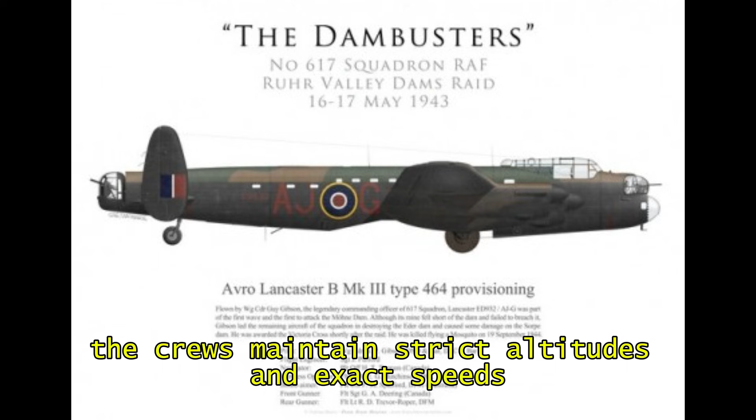Below them lie the reservoirs that power the Ruhr's industrial network. Above them, the crews maintain strict altitudes and exact speeds, trusting machines refined to hold stability at moments when even minor structural weakness could alter the entire outcome.

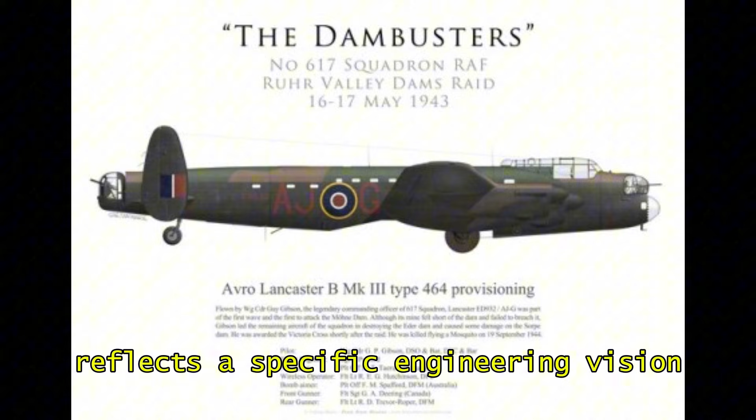Every decision embedded in these aircraft reflects a specific engineering vision shaped years earlier, inside workshops far from the battlefield. As these bombers approach their targets, the success of the operation rests on whether those engineering choices can withstand an

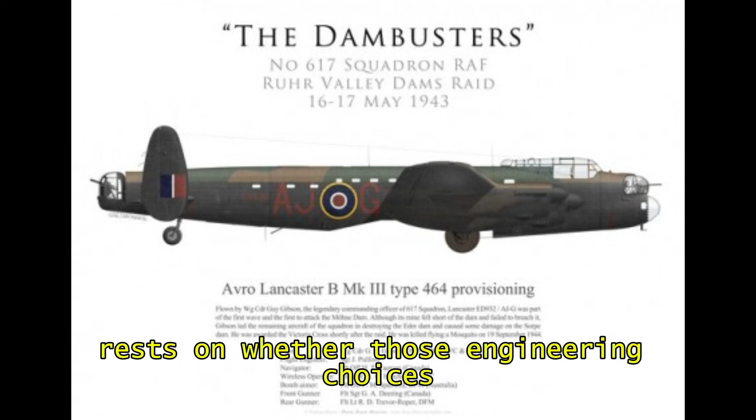environment defined by turbulence, load variation, and the inherent unpredictability of night flying. For viewers following this journey, understanding how such precision became possible adds depth to the entire story that unfolds.

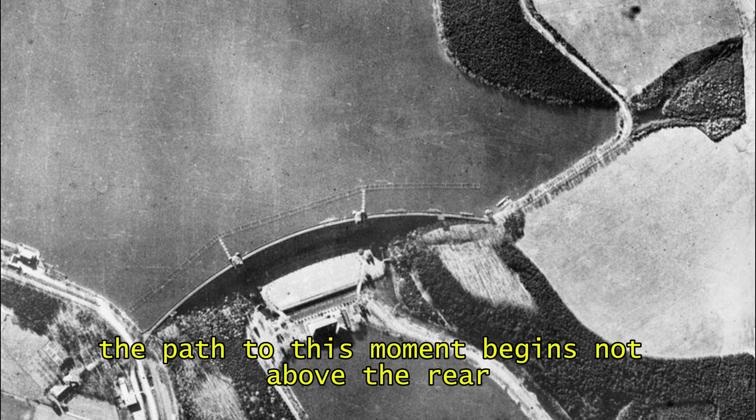The path to this moment begins not above the Ruhr, but inside the British aircraft industry, where a shift in strategic thinking forces designers to rethink how long-range aviation should function.

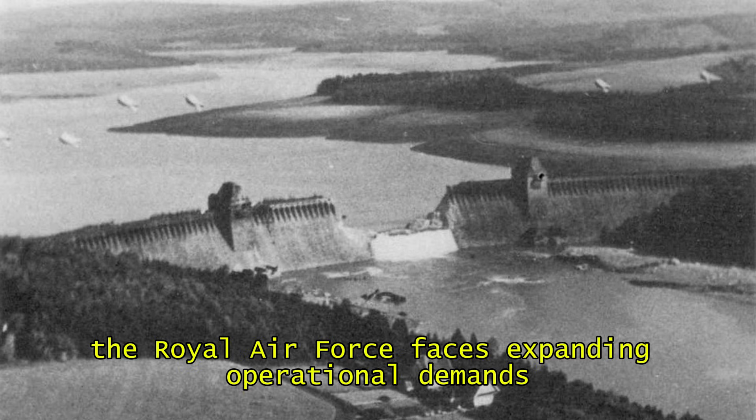By the mid-1930s, the Royal Air Force faces expanding operational demands. Aircraft conceived for limited payloads and moderate range can no longer support a doctrine increasingly shaped by industrial targets located far beyond Britain's borders.

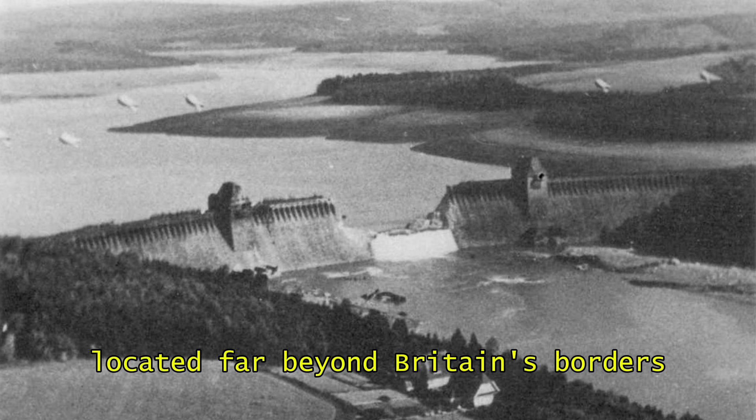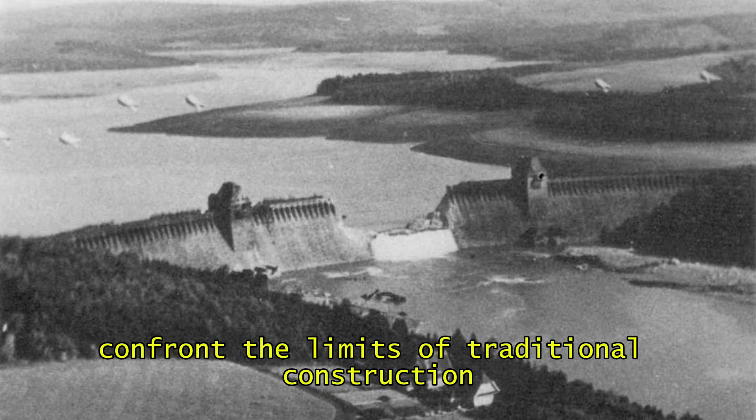Factories study airflow with greater scientific rigour, wind tunnel research grows more influential, and structural engineers confront the limits of traditional construction.

Riveted frameworks that once defined British aircraft design now reveal weaknesses under heavier loads, while aerodynamic efficiency becomes central to every discussion about future bombers.

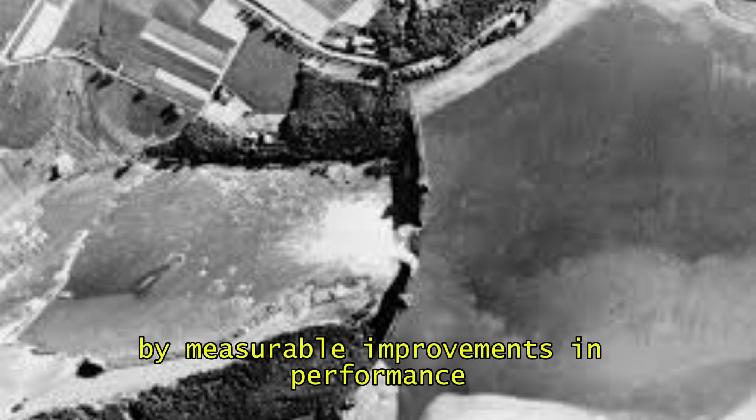The evolution of air power transforms design offices into laboratories where every modification must be justified by measurable improvements in performance, reliability, and mission endurance.

It is within this climate that Roy Chadwick develops a methodology distinguished by its discipline and clarity. Working inside the expanding facilities of Avro, he focuses on the relationship between structural strength, aerodynamic behaviour, and long-term operational demands.

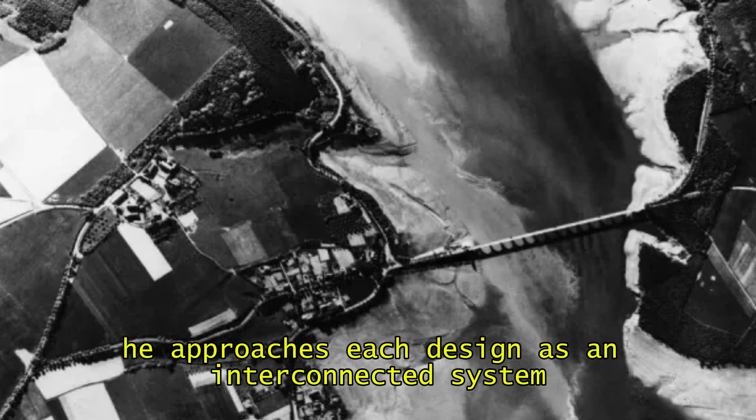Instead of prioritizing isolated performance gains, he approaches each design as an interconnected system shaped by load paths, vibration tolerance, fuel distribution, and manufacturing efficiency.

His early work demonstrates a consistent effort to identify failure points before they appear in flight. This mindset leads him to refine fuselage geometry, reinforce key structural nodes, and optimize internal layouts to support larger payloads

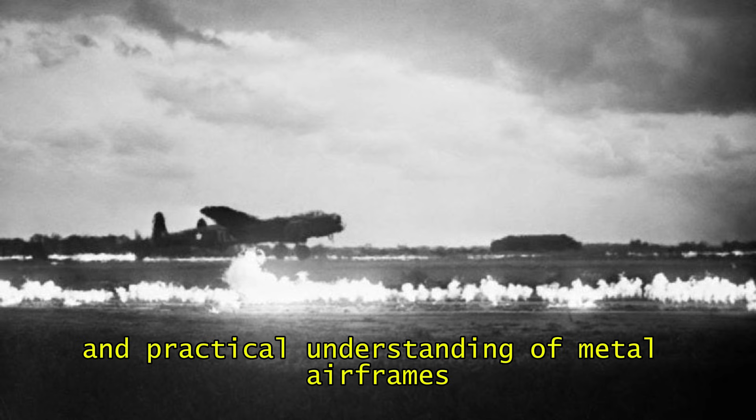without compromising stability. The combination of analytical thinking and practical understanding of metal airframes allows him to interpret Air Ministry requirements with uncommon precision, providing solutions that balance innovation with the realities of large-scale production.

These principles become crucial as the RAF pushes for aircraft capable of carrying more equipment across longer distances. Chadwick confronts challenges that require an exact understanding of aerodynamics, materials science, and structural mechanics.

Increasing wingspan demands improved torsional rigidity. Higher payloads require rethinking weight distribution across the fuselage.

Greater fuel capacity imposes additional stresses on internal members already operating near their limits. Integrating more powerful engines creates new vibration patterns that must be managed through careful alignment and reinforced mountings.

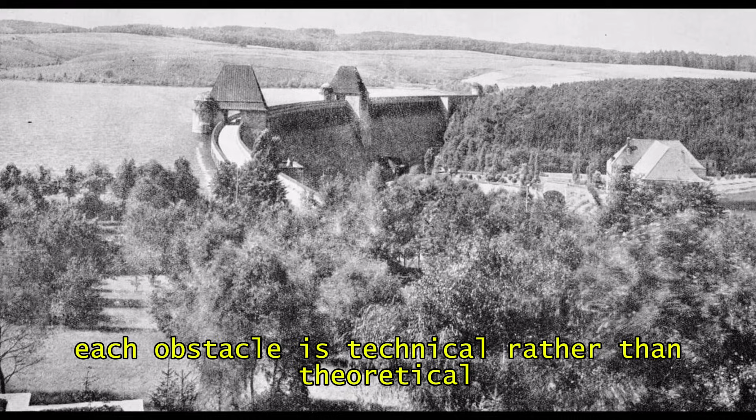Each obstacle is technical rather than theoretical, and solving it requires evaluating how small adjustments influence the overall system. Chadwick's method avoids dramatic leaps and instead builds performance through incremental refinement, ensuring that every modification contributes to an aircraft

that behaves predictably in the demanding environment of long-range missions. By the late 1930s, these insights converge into a design philosophy that will soon shape one of the most influential aircraft of the war. Without yet naming the project, the foundations are clear: a strong but lightweight airframe, a spacious

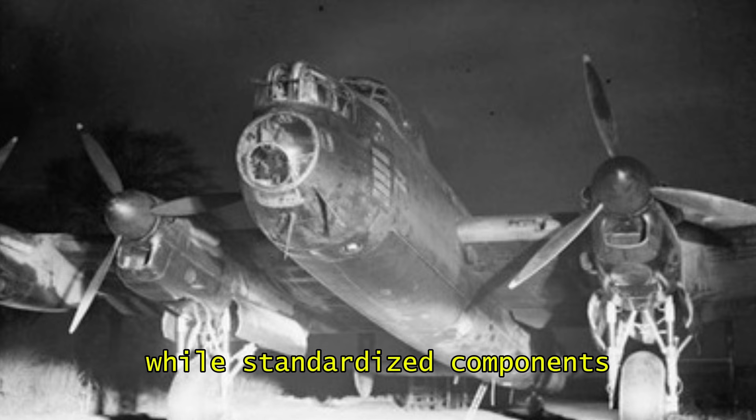internal structure capable of accepting varied payloads, an aerodynamic profile tuned for efficiency at operational altitudes, and a layout optimized for production scale. The emphasis on modularity simplifies repairs in the field, while standardized components reduce manufacturing delays.

This approach produces machines that combine endurance, stability, and adaptability in ways few British aircraft had previously achieved.

The engineering discipline developed during this period becomes one of Britain's most valuable assets once the conflict intensifies, and it directly influences the aircraft that will later perform missions demanding extraordinary precision, including the operation that opened this chapter.

How did Chadwick transform these early engineering principles into the foundation for a bomber that would reshape Britain's aerial capabilities during the war?

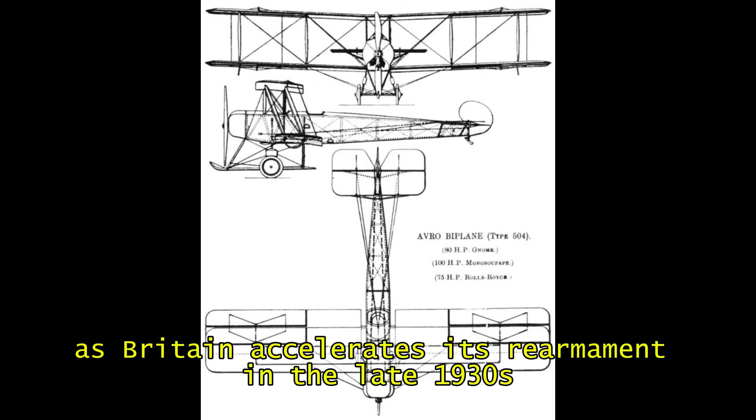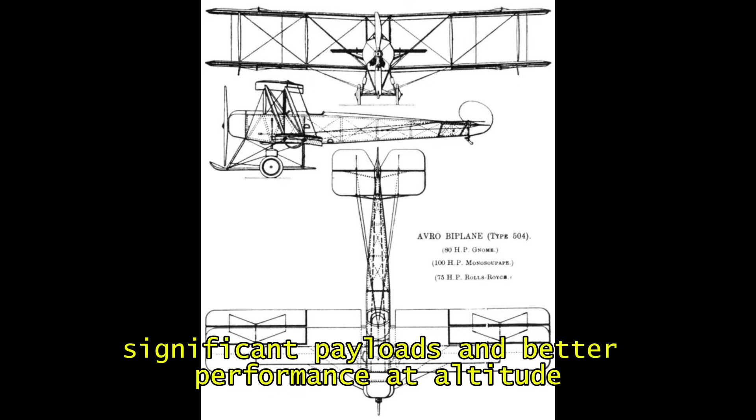As Britain accelerates its rearmament in the late 1930s, the pressure on aircraft designers intensifies. Requirements for long-range bombers grow more complex as the strategic landscape expands beyond local defence. The Air Ministry demands machines capable of sustained operations, significant payloads, and better performance at altitude. Meeting these expectations requires more than incremental improvements.

It requires engineers who can reshape structural logic, revise aerodynamic assumptions, and integrate mechanical systems into a coherent whole. Roy Chadwick steps into this environment with a method grounded in analytical discipline and a willingness to challenge familiar design sequences when evidence supports a better alternative. His early studies of load distribution become central to the evolution of Britain's bomber programme.

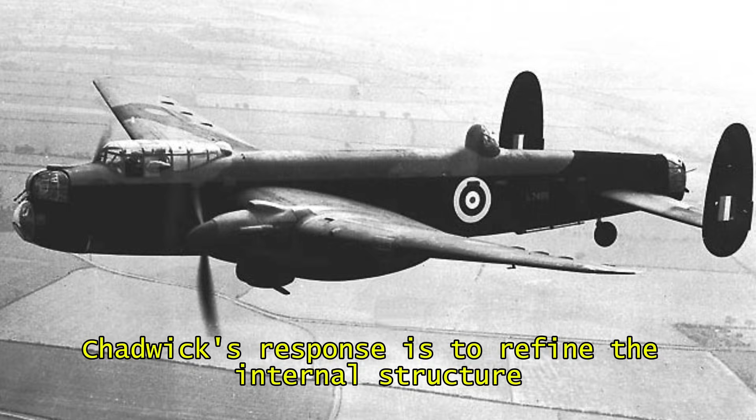Traditional airframes transfer stress unevenly across spars, ribs, and fuselage members, creating points of failure when weight increases or when turbulence imposes dynamic forces. Chadwick's response is to refine the internal structure so that loads flow more efficiently through the airframe. This approach reduces localized stress, increases durability, and allows the aircraft to support heavier equipment without compromising rigidity.

The shift toward more symmetrical load paths also improves stability, particularly during long climbs and sustained turns, where older designs often struggled to maintain consistent behavior.

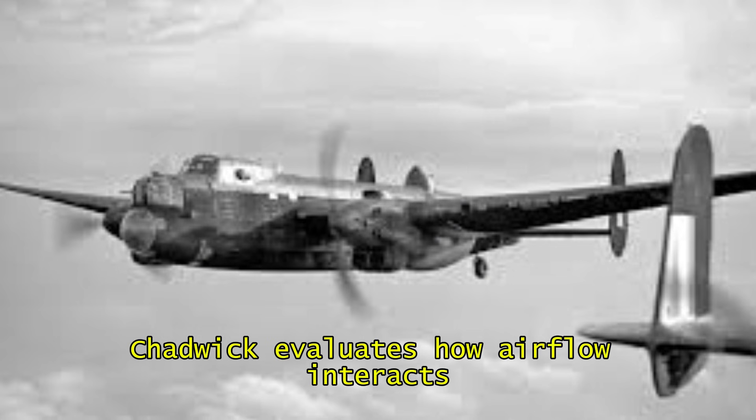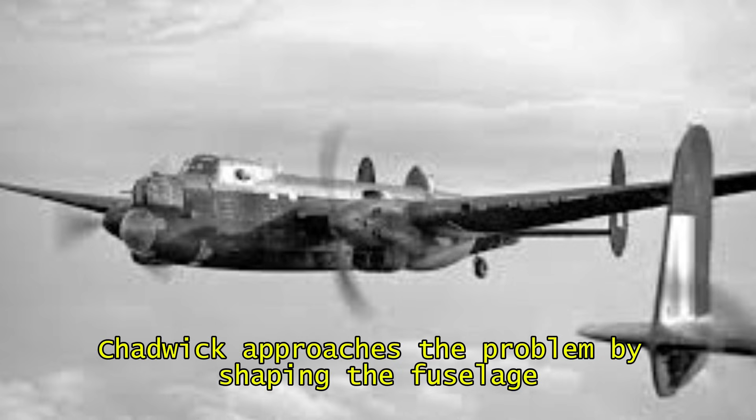Aerodynamic refinement follows closely behind structural improvements. Chadwick evaluates how airflow interacts with expanding fuselage volumes and larger wingspans. Traditional bombers often face drag penalties when designers enlarge the internal space needed for greater range or payload. Chadwick approaches the problem by shaping the fuselage to guide airflow with minimal disruption, reducing drag while maintaining interior capacity.

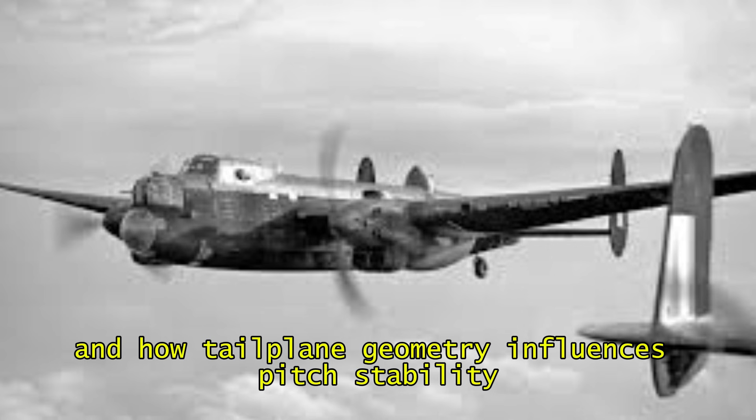He studies how the wing root meets the body, how leading edges affect lift generation at different speeds, and how tailplane geometry influences pitch stability during long missions. These adjustments are grounded in practical testing and analytical review, rather than stylistic choices, reflecting a design philosophy driven by measurable results. One of the most demanding challenges involves engine integration.

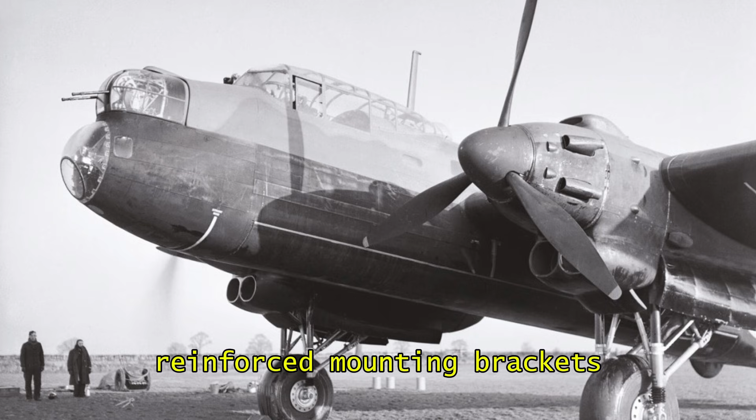As more powerful power plants emerge, vibration patterns increase in magnitude and complexity. Poorly managed, these vibrations can fatigue structural members, affect control responsiveness, and shorten the operational life of critical components. Chadwick focuses on alignment accuracy, reinforced mounting brackets, and airflow improvements around the engine nacelles. By optimizing cooling and airflow stability, he ensures that engines maintain consistent performance across a wide range of operating conditions.

These refinements contribute to more reliable high-altitude flight and improved endurance, both essential to the emerging doctrine of long-distance strategic missions. Chadwick's attention to modular design proves equally important.

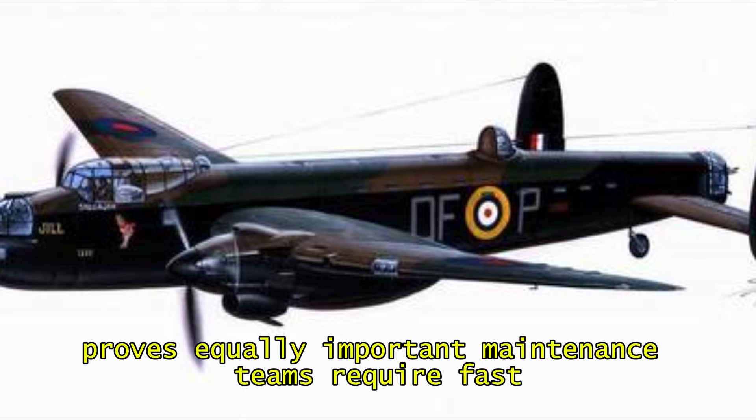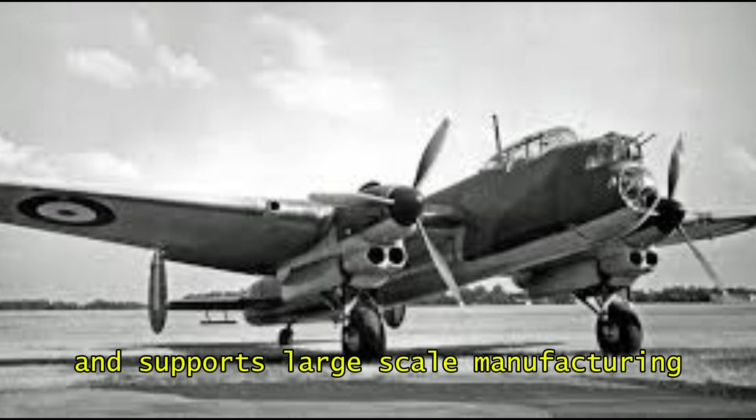Maintenance teams require fast, standardized procedures to keep aircraft operational under wartime conditions. Chadwick develops internal layouts that simplify inspections and repairs by separating critical systems into accessible sections. Wiring, hydraulics, and mechanical controls follow paths that minimize interference with structural members, making it easier to trace, repair, or replace components. This modular approach reduces downtime, increases survivability, and supports large-scale manufacturing by enabling assembly lines to operate with fewer bottlenecks.

By the time Britain enters the conflict, Chadwick's design principles align with the operational needs of the Royal Air Force, which now requires long-range capability on an unprecedented scale. Missions involving industrial targets deep inside occupied territory demand aircraft capable of flying greater distances with heavier payloads while maintaining structural coherence.

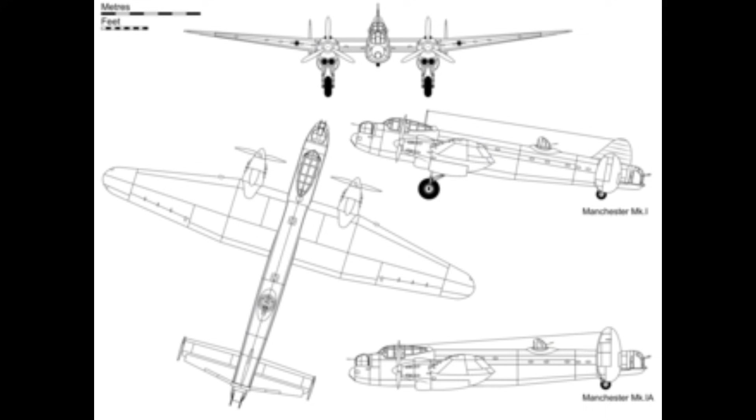Conventional designs face limitations that cannot be resolved through minor adjustments. Chadwick's integrated methodology, built over years of refining structural logic, aerodynamic balance, and mechanical reliability, positions him at the centre of Britain's effort to produce a next-generation bomber that can meet these requirements.

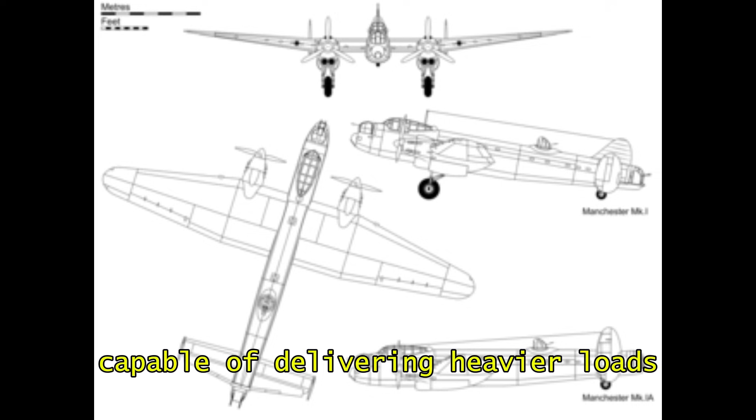As Chadwick consolidates his work, he begins conceptual development on a platform capable of delivering heavier loads across broader ranges than any aircraft Britain has previously fielded.

The emerging design incorporates his core principles: a strong internal framework distributing stress predictably, a fuselage shaped for aerodynamic efficiency, a wing structure capable of supporting large spans without inducing excessive torsion, and internal space optimized for both fuel and payload flexibility. The design avoids excess complexity, relying instead on coherence, strength, and adaptability.

It is not yet the aircraft that will later mark a turning point in the conflict, but the framework is in place and the technical direction is set.

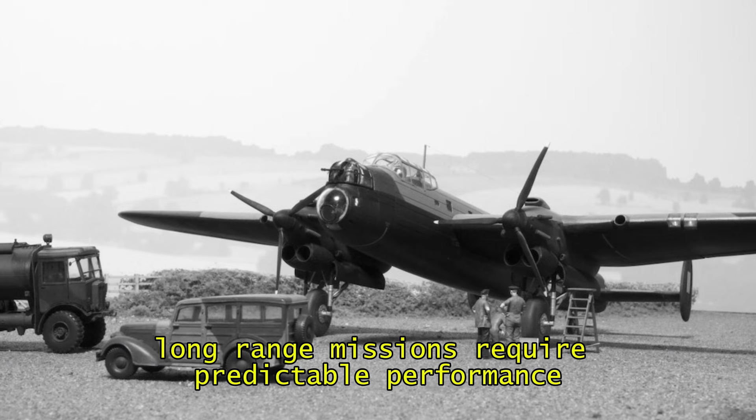These design choices reflect more than ambition. They represent a response to quantifiable needs. Long-range missions require predictable performance under heavy load. High-altitude operations demand aerodynamic stability and consistent engine behavior. Wartime production requires standardized components and ease of maintenance.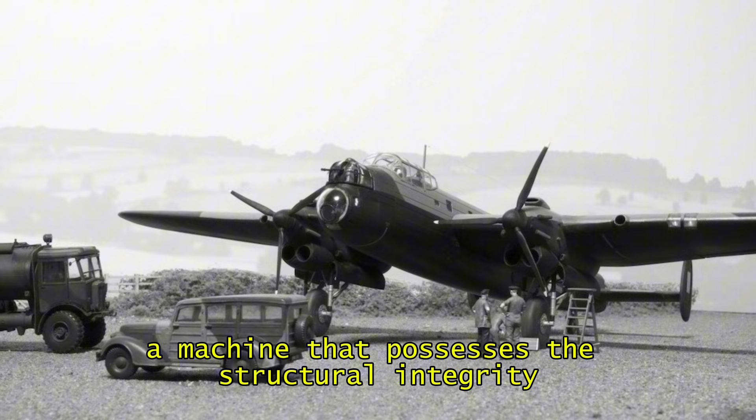Chadwick's design process integrates these demands into an aircraft emerging from disciplined analysis rather than dramatic leaps. The result is a machine that possesses the structural integrity, aerodynamic efficiency, and operational flexibility the RAF requires for missions reaching farther into contested airspace.

As the war accelerates and the demand for advanced bombers intensifies, Chadwick's methodology is positioned to deliver an aircraft capable of supporting the most demanding operations of the conflict, including missions defined by precision, endurance, and extraordinary structural resilience. How would Chadwick refine this emerging design into a bomber that could carry unprecedented loads across long distances while maintaining stability under combat conditions?

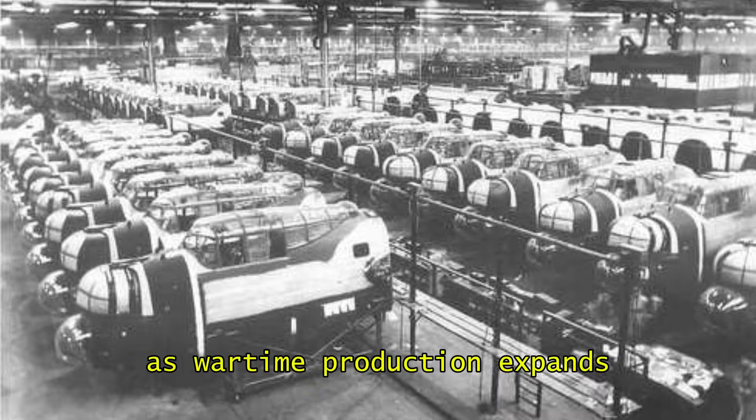As wartime production expands, Britain faces a challenge that reaches beyond individual factories. The nation must create a heavy bomber capable of carrying significantly larger payloads while sustaining reliable performance across long distances. Earlier designs had provided valuable lessons, but none offered the balance of strength, efficiency, and adaptability needed for the operations that now shape strategic planning.

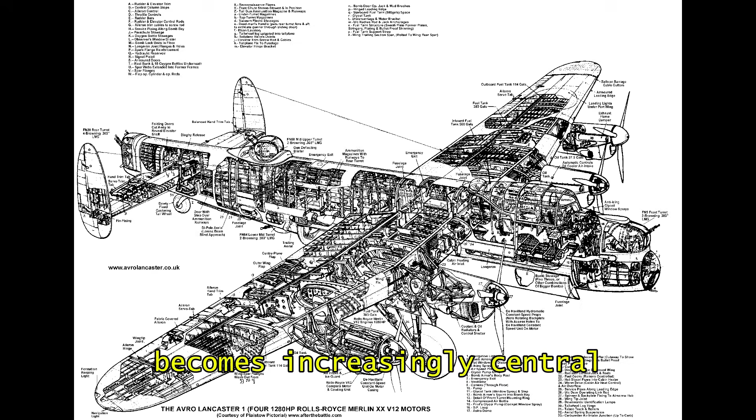In this environment, Roy Chadwick's analytical approach becomes increasingly central. His work is no longer just about improving components. It is about defining a complete architecture able to withstand the structural and aerodynamic demands of deep-range missions. The design program evolves into a comprehensive response to operational needs.

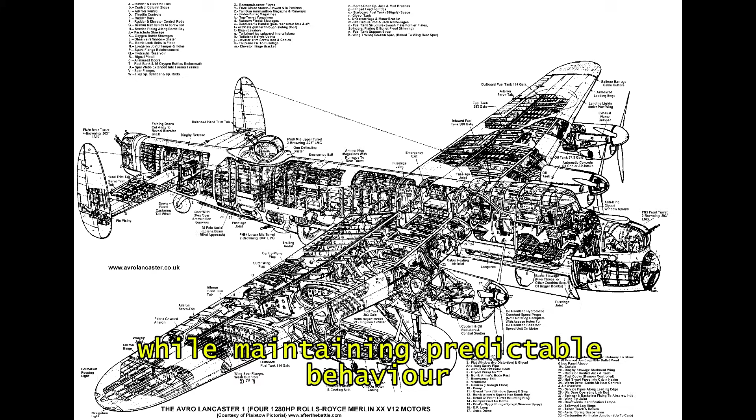Chadwick examines how to distribute weight across a wider wingspan while maintaining predictable behavior at both high and moderate altitudes. He refines the main spars to handle greater bending moments, adjusts the internal bracing to eliminate unnecessary mass, and shapes the fuselage to guide airflow smoothly along its length.

Large bomb bays require a structure that can remain rigid even when empty or partially loaded, and he solves this by reinforcing subtle transition points where the fuselage shifts from curved to flat geometry. These refinements produce an aircraft capable of accepting varied payloads without destabilizing its aerodynamic profile.

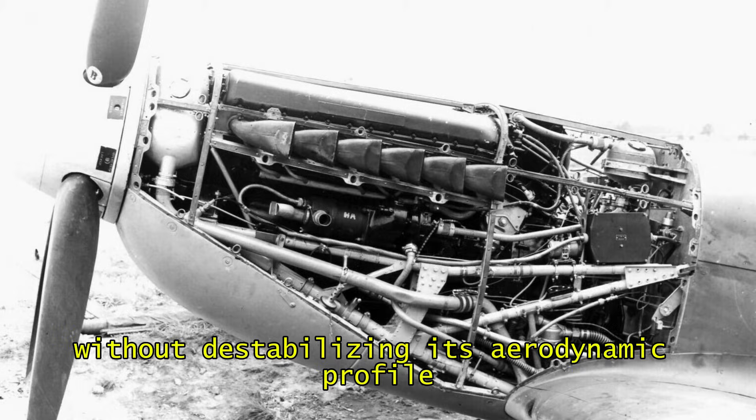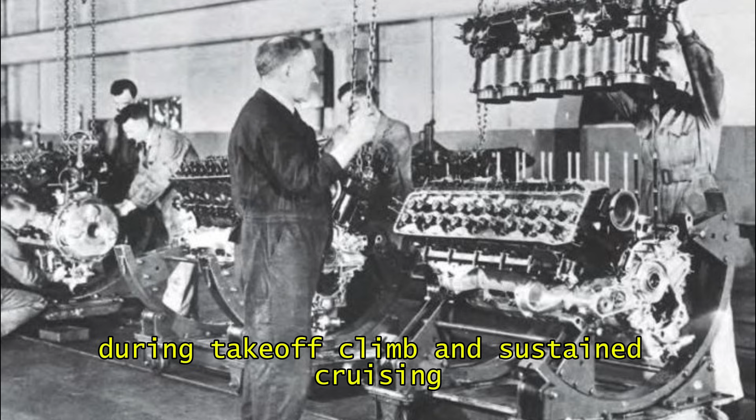Engine selection introduces new technical hurdles. More powerful power plants promise improved performance, but their integration demands careful alignment and vibration control. Chadwick invests significant effort into evaluating how nacelle placement affects airflow along the wing surface and how changes in thrust patterns influence stability during takeoff, climb, and sustained cruising.

Cooling systems must operate efficiently at high altitudes where temperatures drop sharply and airflow becomes thinner. Exhaust arrangements must minimize turbulence that could interfere with flaps or ailerons. Every modification aims to ensure that the aircraft can maintain consistent behavior across long missions, regardless of weather, altitude, or load.

Engine reliability becomes a structural concern as much as a mechanical one, and Chadwick's design decisions reflect this interdependence.

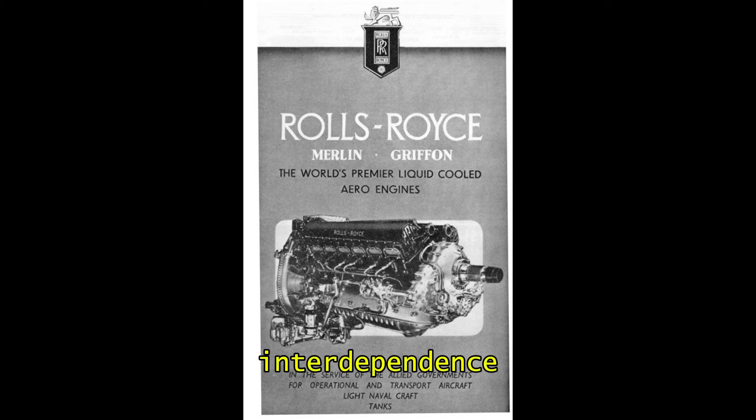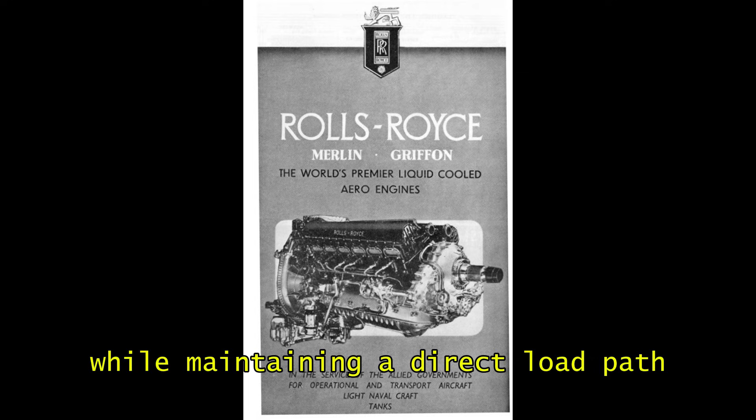Internal layout receives equal attention. A bomber designed for long-range operations requires space for fuel, crew movement, equipment, and defensive positions, while maintaining a direct load path that strengthens the fuselage rather than weakening it.

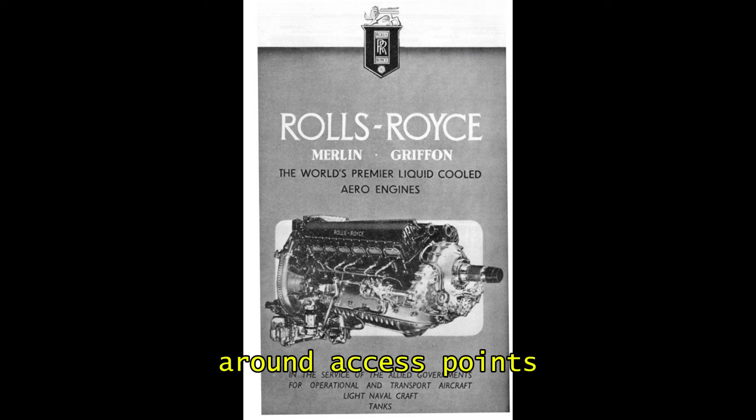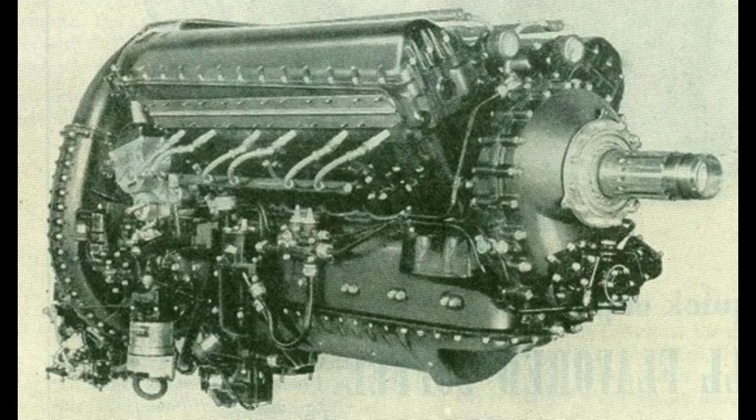Chadwick organizes the internal framework to avoid concentrated stress around access points. He places key systems where maintenance teams can reach them quickly, and ensures that hydraulic and control lines follow clear, protected routes. This thoughtful arrangement reduces downtime, simplifies wartime repairs, and prepares the aircraft for adaptation as operational needs evolve.

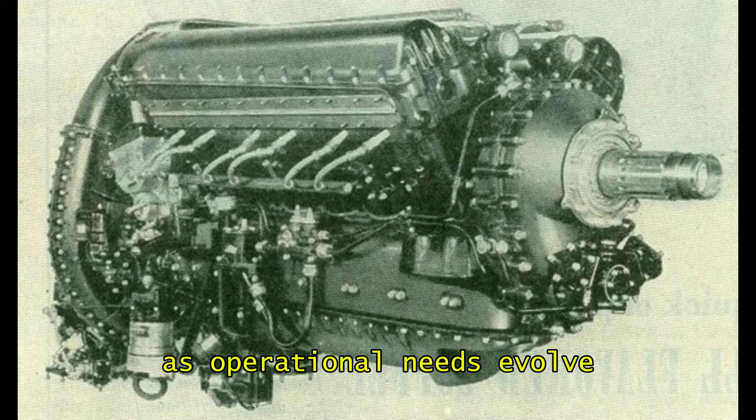The emphasis on accessibility and modularity reflects Chadwick's belief that an aircraft's effectiveness is defined not only by performance in the air, but also by its maintainability on the ground.

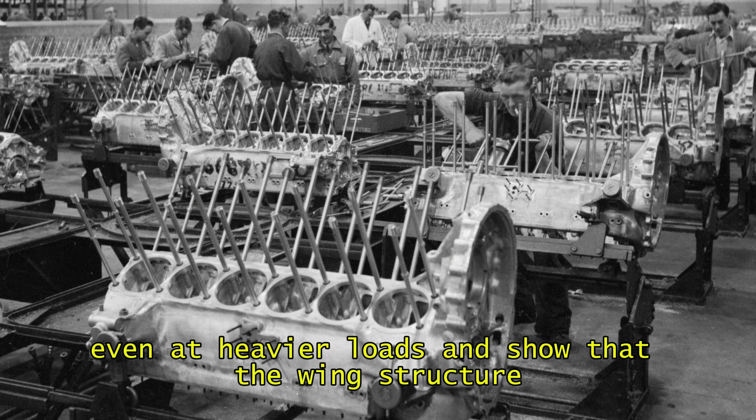As testing progresses, the new design begins to reveal its full potential. Flight trials demonstrate stability even at heavier loads and show that the wing structure sustains aerodynamic forces without producing excessive twist. The fuselage maintains predictable behavior during steep turns, and the internal framework remains solid after repeated stress cycles.

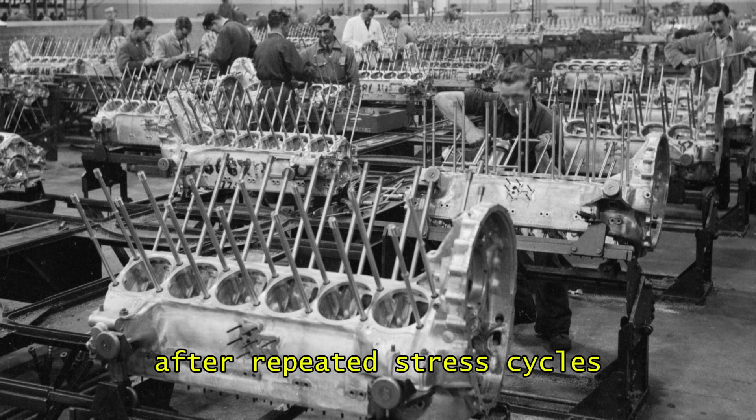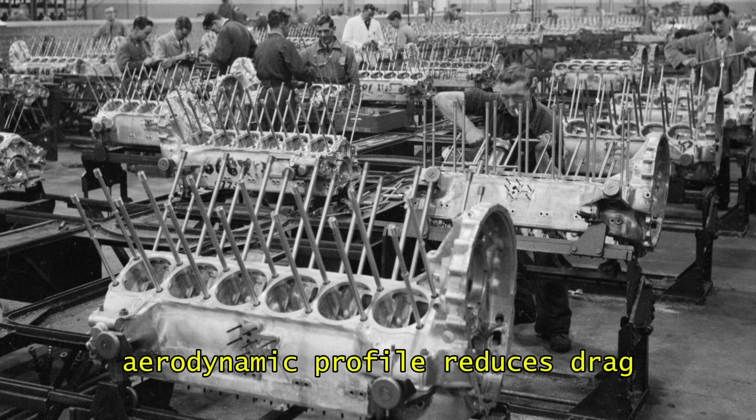The aircraft manages to carry payloads that exceed previous expectations, while still offering range suitable for the emerging demands of strategic missions. Engineers note how its refined aerodynamic profile reduces drag, allowing it to maintain strong performance across long distances.

The design approach becomes a benchmark for heavy bomber development, combining structural intelligence with aerodynamic efficiency. These achievements prepare the aircraft for missions that require endurance, precision, and resilience under conditions that test every part of a machine.

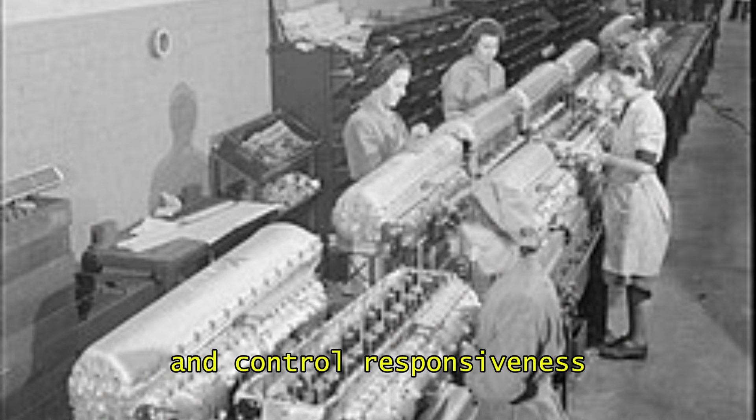Long-range operations impose sustained stress on wings and fuselage. High-altitude flight exposes materials to temperature changes that affect flexibility and strength. Defensive maneuvers test torsional rigidity and control responsiveness. Yet the aircraft's behavior remains consistent, validating Chadwick's insistence on integrating every decision into a coherent structural logic.

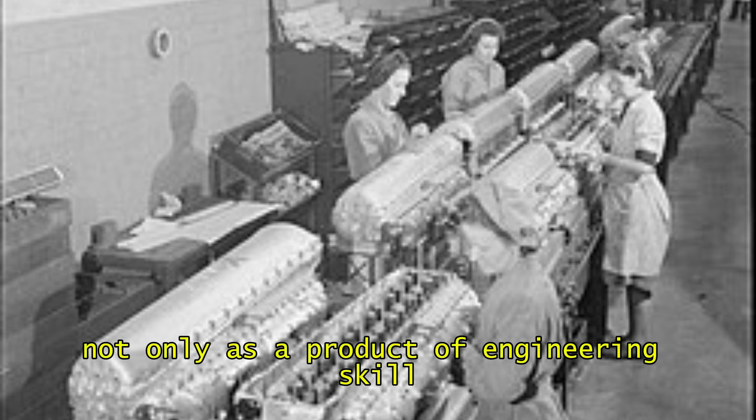The machine emerges not only as a product of engineering skill, but as a demonstration of how careful analysis and disciplined methodology can create a bomber capable of influencing the broader course of the conflict.

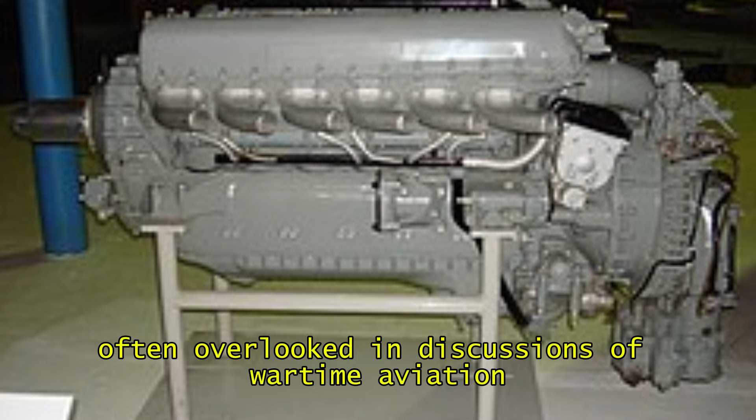By the time the design reaches full operational capability, it represents a synthesis of Chadwick's principles: a strong internal framework distributing loads predictably, a wing structure optimized for lift across a wide envelope, an aerodynamic shape that minimizes drag without sacrificing internal capacity, and a layout that supports rapid wartime maintenance.

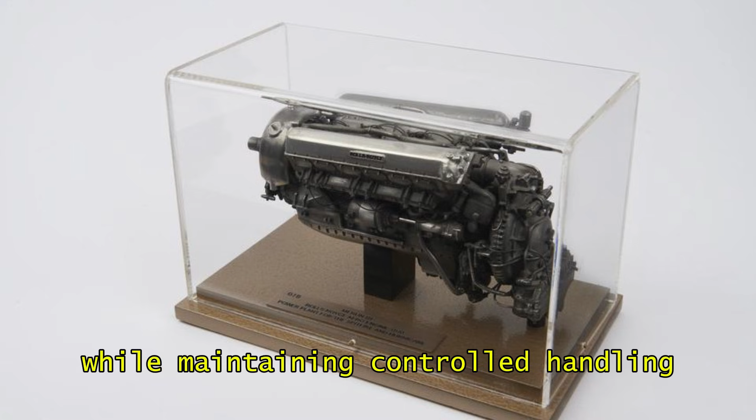Its ability to carry unprecedented payloads while maintaining controlled handling transforms it into one of the most important aircraft produced by Britain during the conflict. This transformation marks a turning point in long-range aviation, demonstrating how engineering insight can fundamentally reshape operational capability.

What challenges remained as Chadwick's design transitioned from engineering blueprint to large-scale wartime production? And how would those challenges influence the final stage of development?

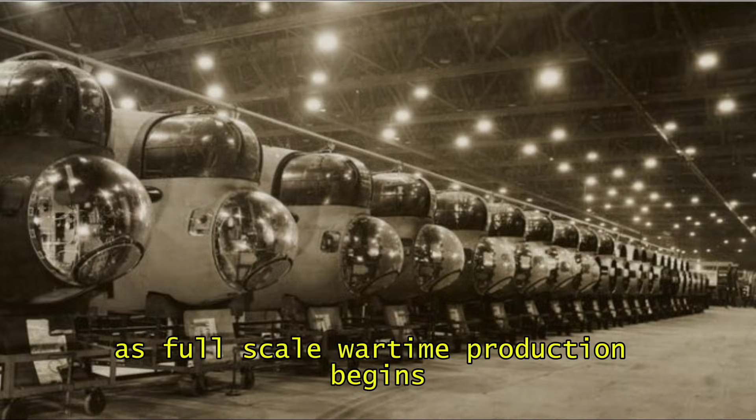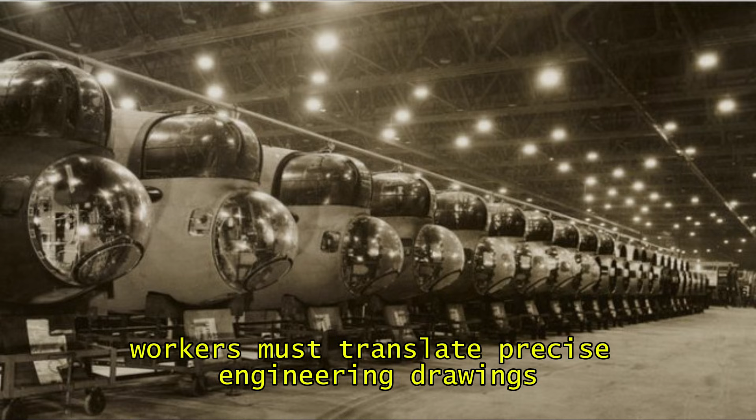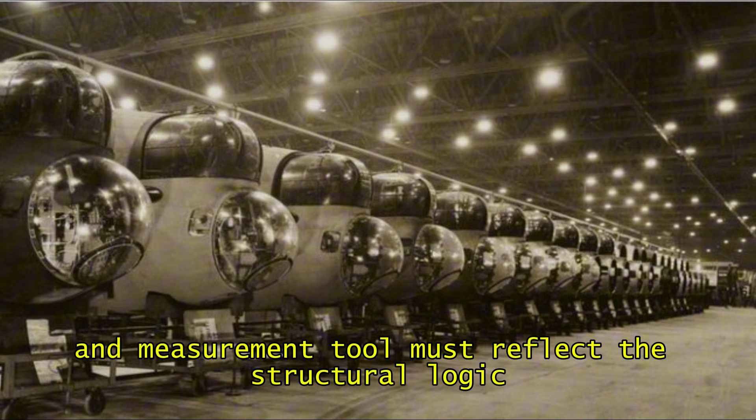As full-scale wartime production begins, the transition from prototype to mass output introduces pressures that test every aspect of Roy Chadwick's design. Line workers must translate precise engineering drawings into repeatable assembly processes capable of operating at unprecedented speed. Every jig, fixture, and measurement tool must reflect the structural logic embedded in the original blueprint. Achieving consistency becomes a challenge as the demand for heavy bombers increases rapidly.

Materials arrive from multiple suppliers, and slight variations in metal quality or rivet composition can affect the final structure. Chadwick's rigorous tolerances require factories to elevate their manufacturing discipline, ensuring that each aircraft retains the load-bearing capacity, aerodynamic coherence, and mechanical reliability intended in the design stage.

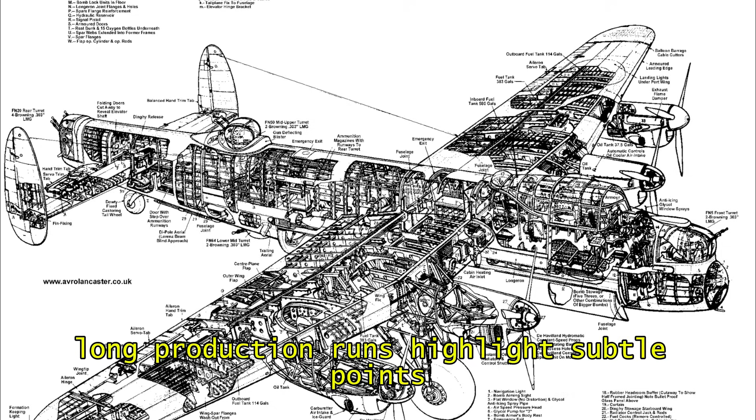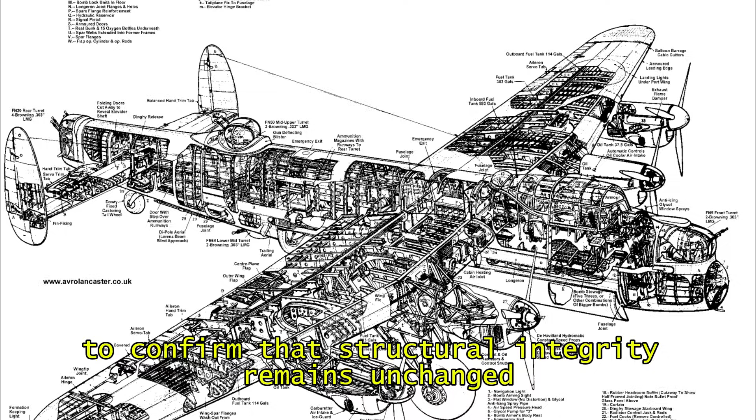Scaling the design reveals engineering details that prototypes rarely expose. Long production runs highlight subtle points where stress accumulates more rapidly than expected, particularly around areas where internal framing supports heavy equipment. Rivet patterns must be adjusted to prevent premature fatigue, and access panels require reinforcement to avoid deformation during repeated maintenance cycles. Even minor modifications prompt comprehensive analysis to confirm that structural integrity remains unchanged.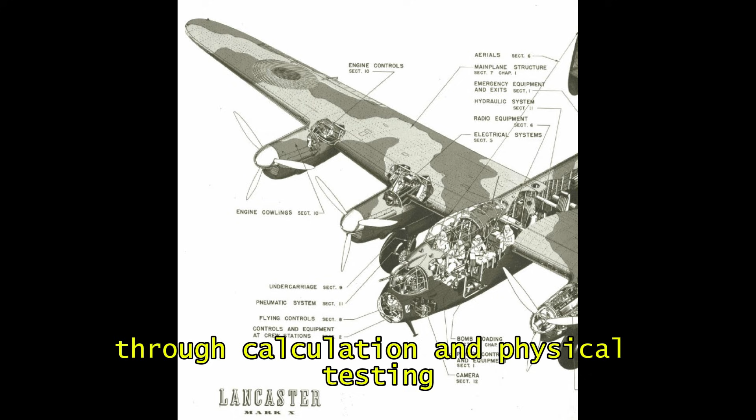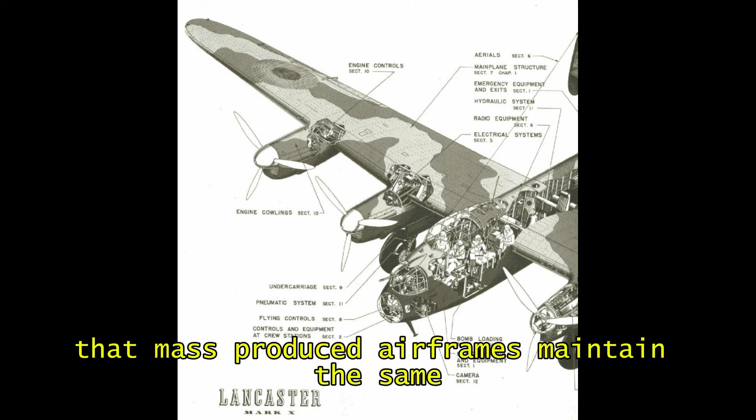Chadwick insists that every adjustment be validated through calculation and physical testing rather than intuition, reinforcing a culture where engineering evidence dictates decisions. This discipline ensures that mass-produced airframes maintain the same predictable behavior demonstrated by the earliest development models.

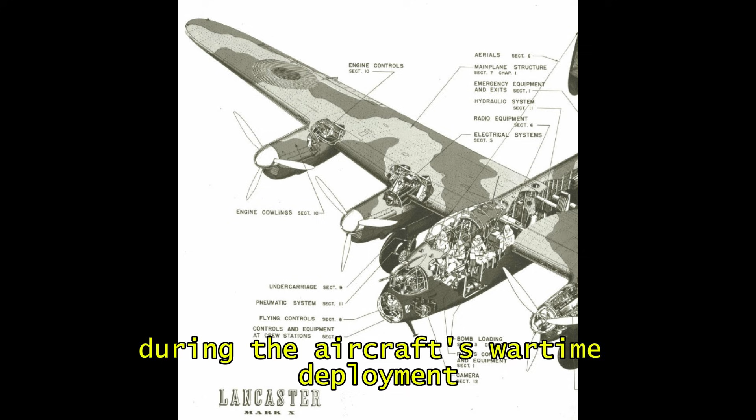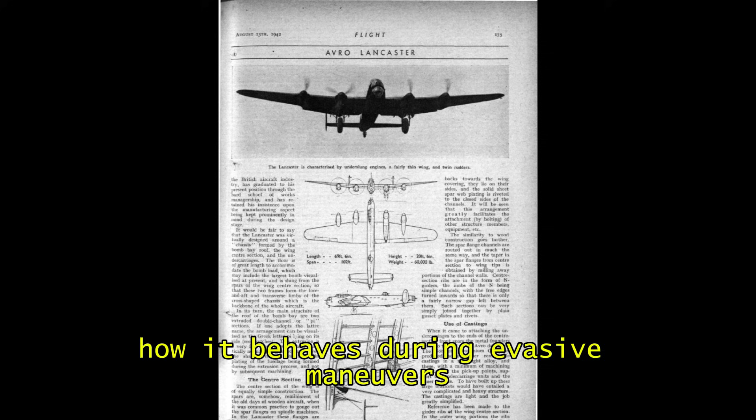Operational feedback becomes a crucial influence during the aircraft's wartime deployment. Real missions impose forces that even advanced calculations cannot fully anticipate. Crews report how the aircraft responds under maximum payload, how it behaves during evasive maneuvers, and how it maintains control when damaged by flak or adverse weather.

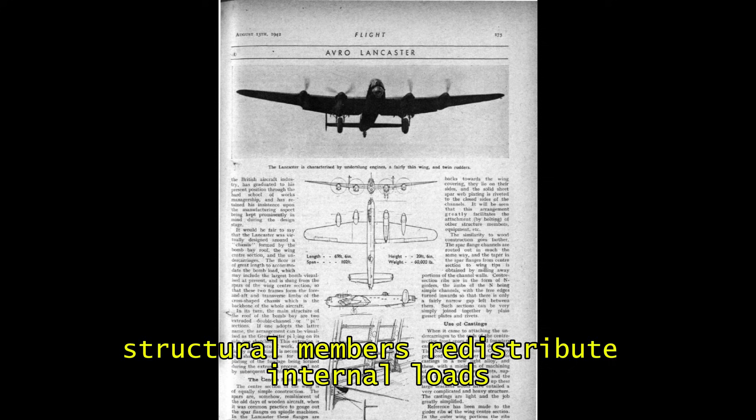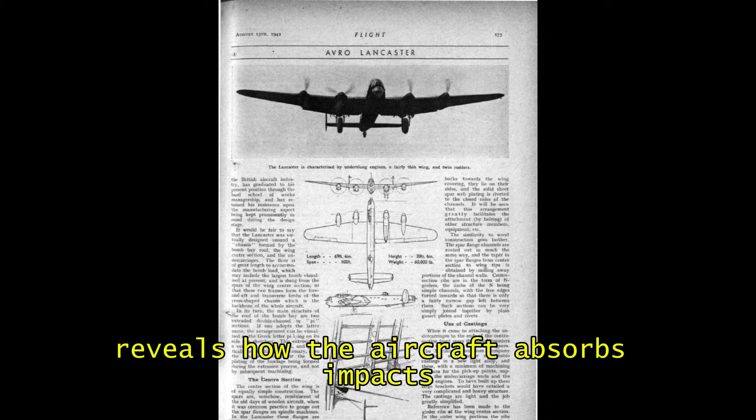Chadwick studies these reports to refine structural members, redistribute internal loads, and strengthen high-stress zones. The broadened experience of frontline operations reveals how the aircraft absorbs impacts that would compromise earlier designs, demonstrating the value of his integrated approach to structure, aerodynamics, and mechanical systems. Adjustments introduced during production runs further increase resilience, reinforcing the bomber's reputation for reliability across demanding missions.

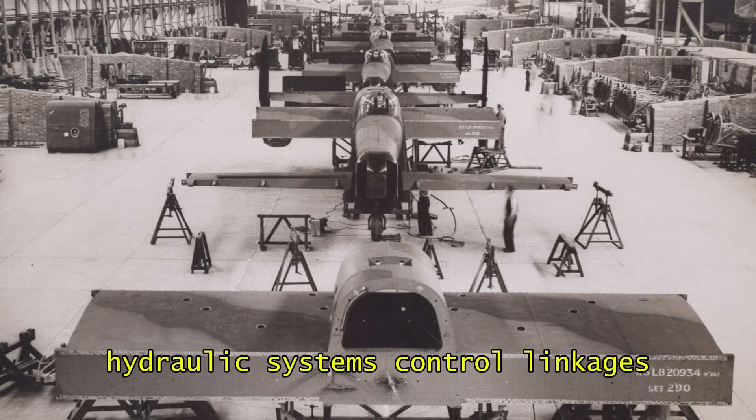Maintenance requirements evolve alongside operational realities. Ground crews discover which components experience the highest wear during repeated long-range flights. Hydraulic systems, control linkages, and electrical lines require improved routes to prevent chafing or interference with structural members.

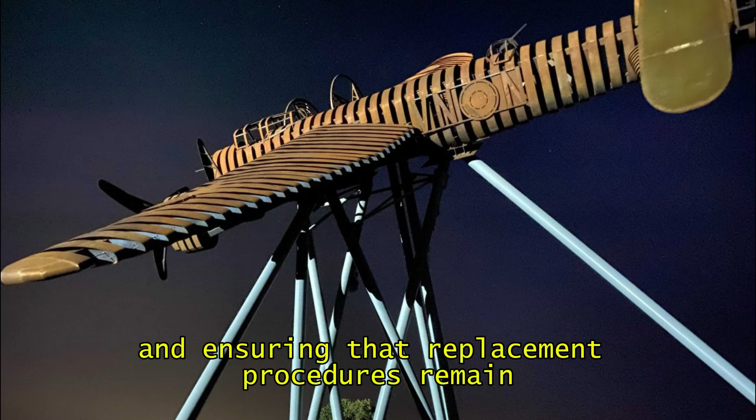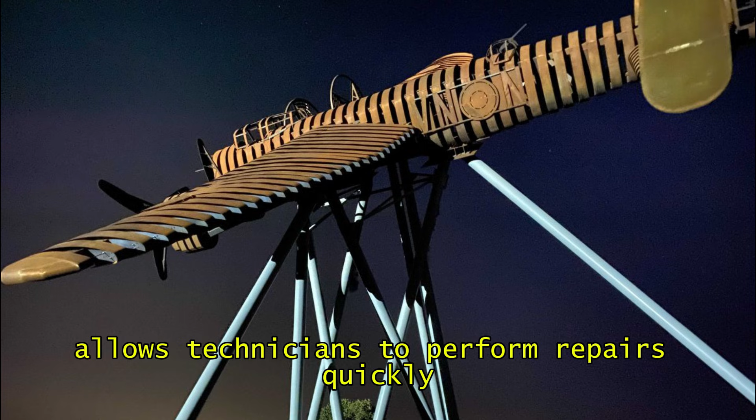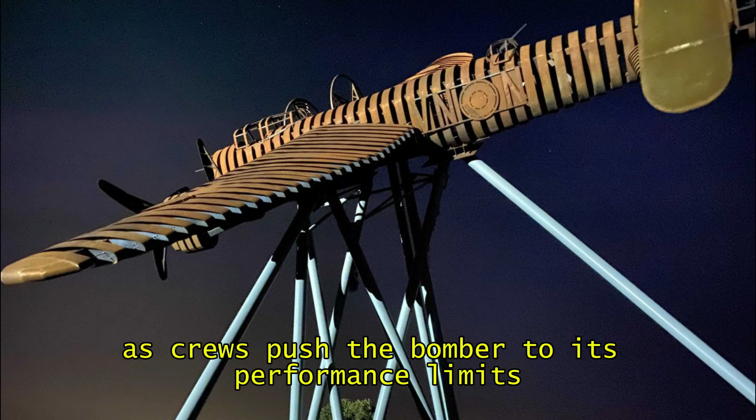Chadwick responds by standardizing internal layouts and ensuring that replacement procedures remain consistent across different production batches. The clarity of the aircraft's internal architecture allows technicians to perform repairs quickly, reducing downtime and increasing sortie capacity. This maintainability proves essential as crews push the bomber to its performance limits, flying distances and payloads rarely attempted by earlier designs.

As the aircraft proves its capability, its operational role expands beyond the missions envisioned at the design stage. Commanders begin assigning tasks that require both exceptional structural strength and aerodynamic stability under conditions that push the upper thresholds of performance. The bomber carries specialized equipment, experimental payloads, and configurations that demand confidence in its internal framework. Chadwick's decision to prioritize structural predictability allows the aircraft to adapt to these emerging roles without major redesigns. The combination of strength and flexibility makes it a platform capable of supporting operations that require precision, endurance, and controlled handling across hostile airspace.

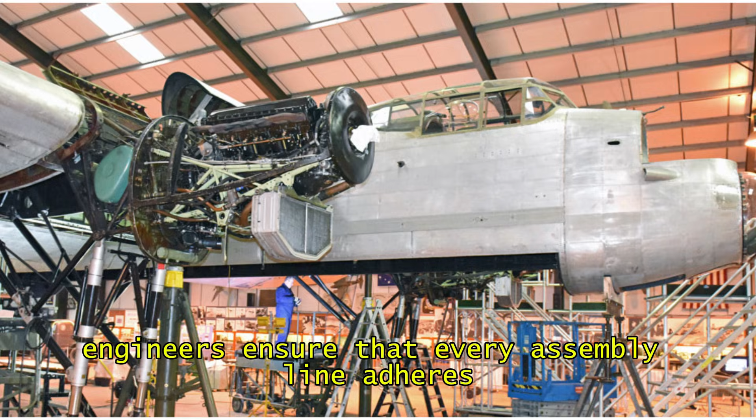Large-scale production brings additional pressures related to resource allocation and strategic planning. Facilities must coordinate material supply, labor training, and quality assurance to maintain output. Engineers ensure that every assembly line adheres to the same geometric accuracy necessary for the bomber to retain its aerodynamic profile. When shortages appear, substitutions require immediate evaluation to confirm that performance will not be compromised.

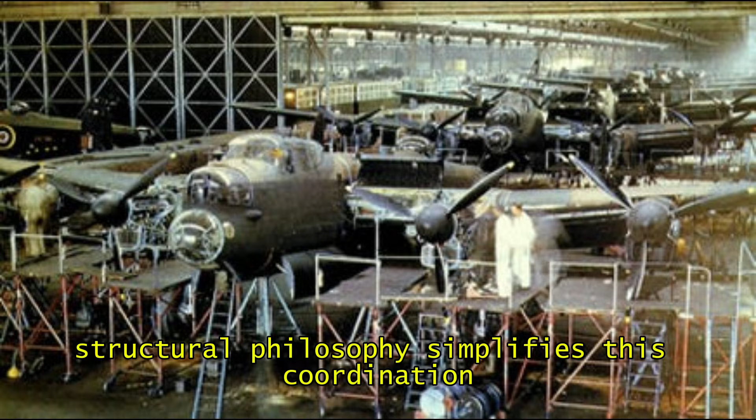The collaboration between designers, production managers, and field units becomes essential to sustaining output at a rate that matches operational demands. Chadwick's clear structural philosophy simplifies this coordination by providing a stable foundation that guides manufacturing decisions throughout the program.

By the time the bomber reaches full maturity in service, it embodies more than a collection of parts. It represents an engineering evolution built on disciplined methodology, detailed analysis, and careful adaptation to real operational feedback. The machine's ability to carry heavy loads across long distances while maintaining predictable behaviour under combat conditions reshapes the strategic reach available to Britain's air forces.

Its structural strength, aerodynamic efficiency, and internal logic form the basis for missions that require exceptional precision. As production continues, the aircraft becomes a symbol of how engineering principles applied methodically can influence the broader course of wartime aviation.

How did the aircraft's performance in the field validate Chadwick's design philosophy, and what final conclusions can be drawn about the engineering legacy he left behind?